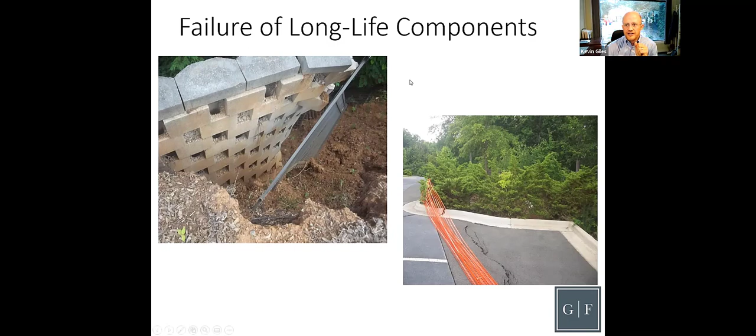We have some slides coming up in a minute, more specific about reinforced concrete construction, to help teach you a little bit about what to look for.

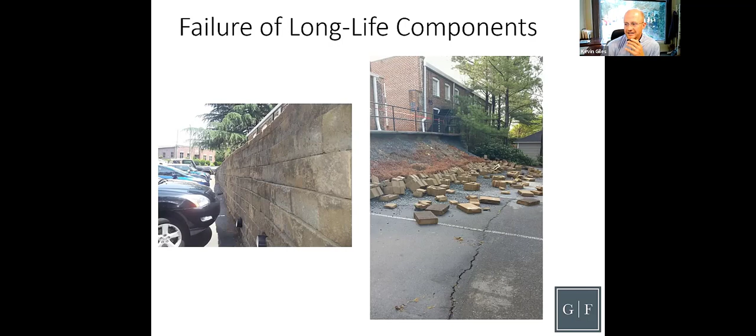So this particular retaining wall is an interesting story in that we were literally on site 6 months prior to that complete collapse. But again, it's the unseen components—the geogrid reinforcement that was not installed on this particular wall. You would not necessarily see it if it had been installed. It's a hidden component, and after the failure, you can clearly see there was no geogrid fabric reinforcement behind it, and the drainage systems were also not adequately installed behind the wall.

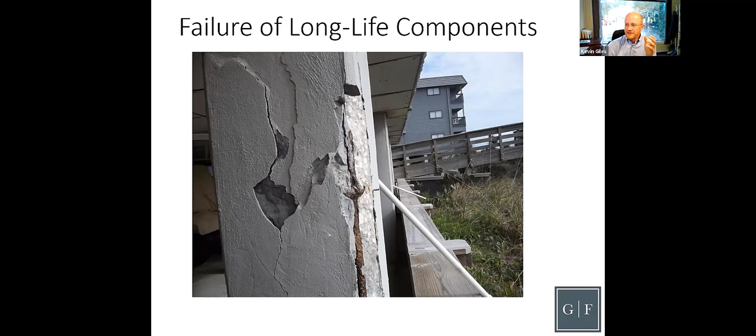On this one, the whole corner of a column had fallen off—a chunk of that concrete had fallen off this particular column. Here's more spalling that happened in that concrete column. These are the symptoms to look for. I'd like to think any layman could look at this and tell you something's not right—this is not what it's supposed to look like. So if you see this on your buildings, it would be cause for concern.

This particular building had an engineered plan in place for how to repair all of these columns. They had already established funding, budgeted from reserves to fix it, but they had to prioritize the repairs—the worst columns were going to get fixed first. Due to funding constraints, they were going to delay the secondary columns, which didn't have as bad spalling, for another year or two, repairing them over a period of time.

There are some repair options that are pretty reasonable for fixing these types of issues. To prevent this in oceanfront environments, keeping those columns painted will certainly help.

That's probably the best prevention method, keeping those columns painted and those exposed concrete surfaces covered with a good coating to prevent moisture intrusion. But if you see deterioration, it's certainly a structural problem.

This concrete, in theory, would be another long life component. These are reinforced concrete construction, something that would have a 50 to 100-year plus expected useful life, and we would not generally anticipate premature failure. Now if it's in a coastal community and you're working with a very experienced reserve study provider, they've probably seen this before, and they'll start recommending that as you approach year 30 or 40, you're likely going to start seeing some of these issues.

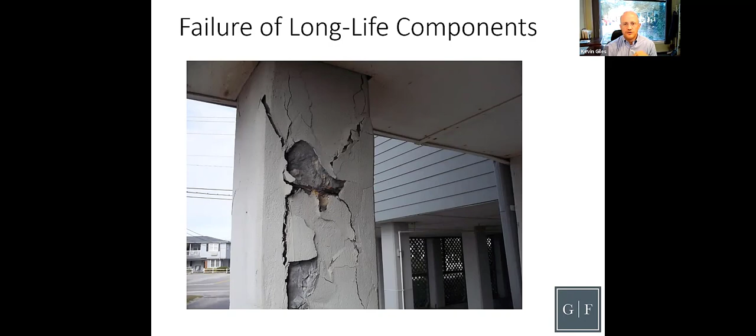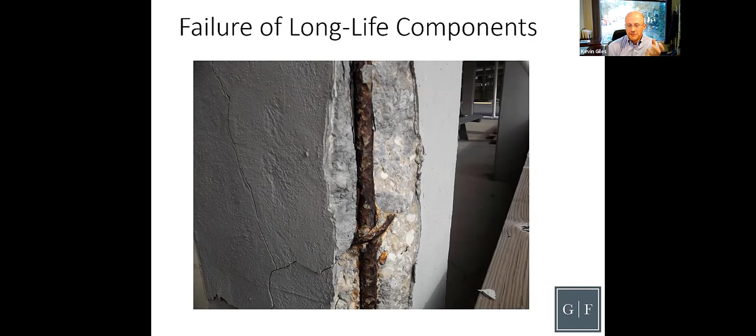So again, these are just some examples, some photos of those components. The construction for that building in Miami was reinforced concrete, so it's the same type of construction as this.

The next few photos will show you how these columns are constructed. This is from a different project we worked on, a new construction project using reinforced concrete columns. In this photo, you can see that the rebar has been set up.

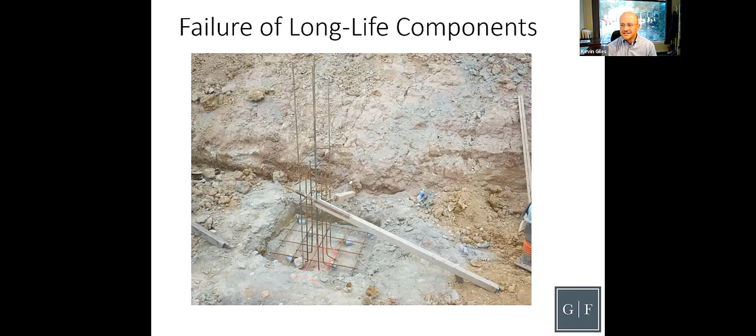So they've built their rebar cage, as they call it. That cage, that rebar layout, is designed by an engineer. The size of the rebar, the spacing of the rebar, how all of this works is designed by an engineer.

After the rebar cage is built, they build the formwork to go around the rebar. You can see these wood boards, these 2x4s, holding the formwork in place, and then they're angularly braced back down to the concrete slab, holding that formwork in place so we can pour the concrete into it.

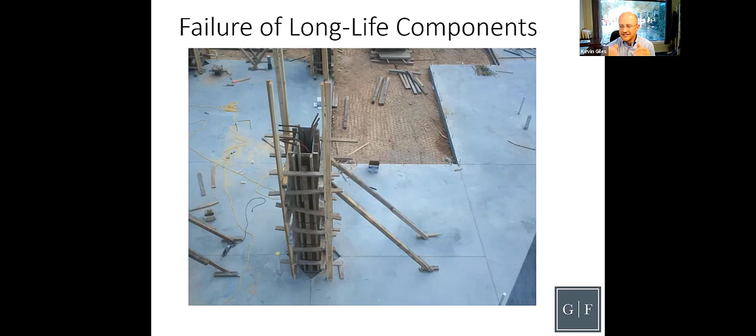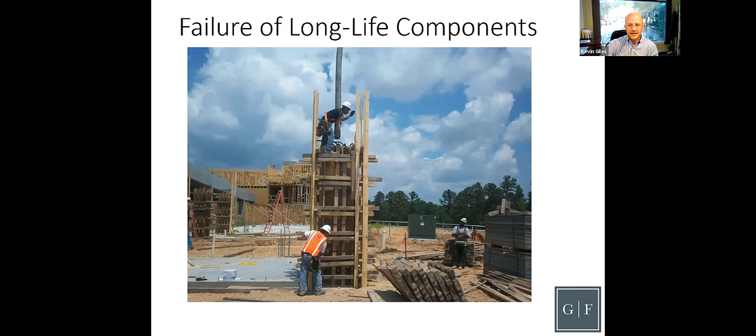This photo is looking down onto a column from above. Here we're pouring the concrete into the formwork, into that column. That hose coming from above is attached to a concrete pumping truck that's pumping the concrete into the column, and those workers are holding the hose in place. There's usually a vibrator installed to make sure the concrete fills all the empty air pockets within the formwork.

I see a question here about a 50 to 100 year lifespan for retaining walls seeming way over optimistic. I would certainly agree for wood retaining walls. Any wood retaining walls we see, we'd estimate certainly a 20-year life.

The way we approach it for reserve studies with retaining walls is, if there's a significant volume of segmental block retaining walls that would pose a significant amount of risk to a community, we're certainly going to allocate some funds for those repairs.

However, we've certainly seen plenty of segmental block retaining walls. I think the technology is about 30 to 40 years old now, they started using it in the early 80s, I believe. We've seen plenty of communities with segmental block retaining walls that have had no movement, no deflection, no cracking, no apparent deterioration whatsoever, and they're already at year 30 or 40. There's nothing to suggest otherwise. It's a stable component, it's concrete. So depending on the retaining wall type and construction, that will depend on what we estimate the estimated life to be for retaining walls.

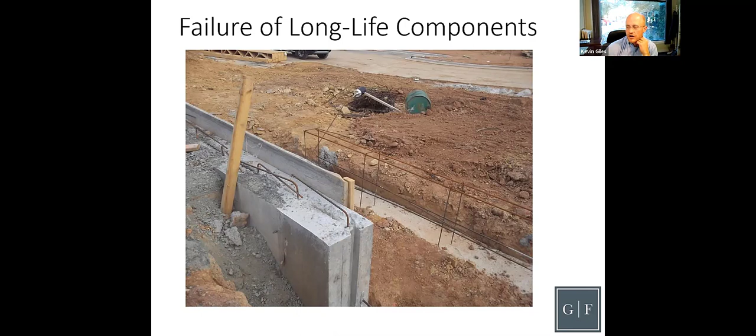Moving forward a little bit, there's a whole bunch of other long life components that an association should at least be aware of when doing your reserve studies.

If these components are common areas, these are some things you should be taking an active role in your reserve study process to make sure you're being covered for, or at least aware of, so you can know what risk you're assuming as an association.

Foundations and framing components, like a wood framed house or a cinder block CMU foundation wall, are generally accepted as permanent structures. We've got plenty of houses built in the early 1900s that are still standing today, well over 100 years old. These foundations and framing systems are generally supposed to be permanent. However, depending on soil conditions and other factors, you could have settlement in foundation walls that would require stabilization or other repairs.

Depending on framing situations, termites can certainly wreak havoc on wood framing. If you have crawl spaces that your association is responsible for, like a 3-story stacked condominium building with crawl spaces underneath the bottom floor, those typically become common areas the association is responsible for since they're not inside the unit envelope. Crawl spaces can be neglected - that's one of those gap areas where no one ever goes in or worries about it, and then a home inspector eventually discovers standing water, mold, and rotted wood.

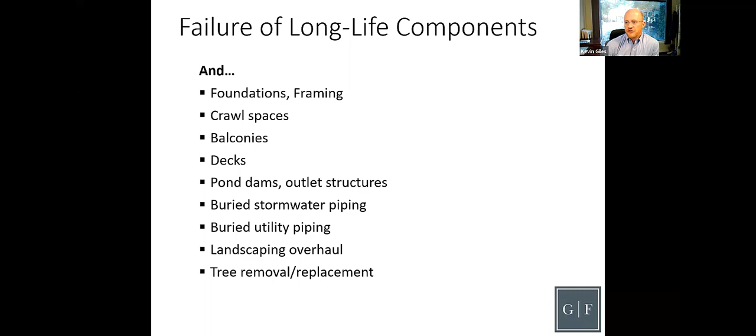Another surprise or unexpected expense can be new ordinances.

A couple ordinances that are most common would be the ADA, Americans with Disabilities Act. If you've been through enough of these webinars, you've probably heard one or two about accessibility and what an association's requirement is for meeting accessibility standards, even if they were grandfathered in and the buildings were built beforehand. So there could be some surprise expenses regarding making your older buildings accessible.

Fire suppression systems - the state of Florida has actually been in about a 15 or 20 year court battle forcing older buildings to retrofit with fire suppression systems. So if a building was built in the 70s or 80s and did not have fire sprinklers, the state of Florida is now pushing for those buildings to get fire suppression systems installed.

Pond dam hazard ratings - in North Carolina, maybe 5 or 6 years ago, the state reset the rules for how they label dam hazards. So your pond that your community owns and maintains with an earthen dam, which North Carolina had considered a low hazard, was changed to possibly medium or high hazard, which then required emergency action plans and a bunch of other things. That's another possible new ordinance that may come with a surprise expense.

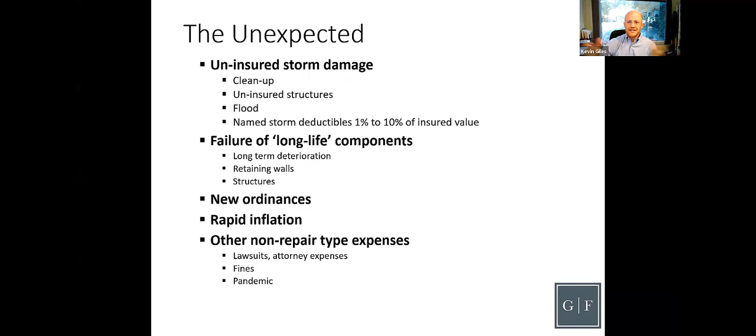And then the other non-repair type expenses: lawsuits, attorney expenses, that type of thing. So these are what I'm calling the unexpected major expenses. So how to plan for it, how to budget for it.

A couple different sources. Number one, insurance - talk to your insurance providers, figure out where those gaps are, figure out if you can buy additional coverage, figure out if you feel like you have enough retaining walls to warrant insuring them, then maybe you should add those to your insurance policy.

Another thing is having margin in your budget. If there's a little bit of extra room in your budget every year, that's going to provide you at least some of that basic margin to give you flexibility to help cover some of these expenses.

A lot of the communities we work with, it just seems the goal is to keep the dues as low as possible, reduce the dues, don't ever raise the dues, keep them as low as possible. But the buildings are going to continue to deteriorate, continue to get older, and the cost of materials is going to continue to go up. This is always going to happen.

The mindset of we need to never raise the dues - I don't see it in governing documents that says the responsibility of the board of directors is to never raise the dues. It usually says the responsibility of the board is to maintain, repair, replace, and manage the common areas. It doesn't say you have to keep the dues as low as absolutely possible. So having some margin in your budget will help fund those unexpected events. The reserve study is a very good tool.

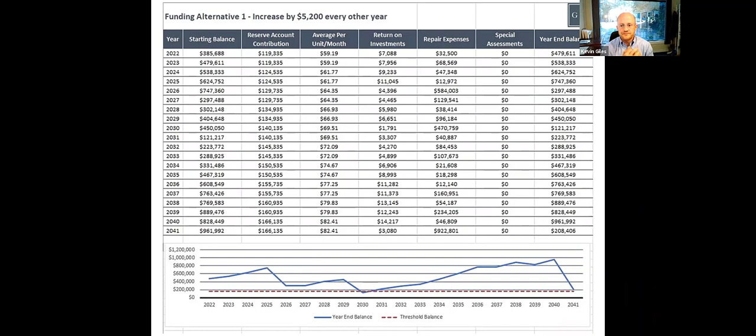Okay, a couple of questions rolling in. So long-term items, do you recommend adding repair allowance into your study?

Yeah, it depends, it depends. I hate to sound like an attorney. If we're doing a 20-year reserve study and we see something that we think is going to last 25 years, then yes, we're going to put an allocation of funds at year 20 to begin to prepare for that. We're going to call it an allocation of funds to replace metal roofing or whatever the component is. And then we're just going to have a discussion in the report - hey, look, this has an expected useful life of 25 more years. It's going to fail shortly after the end of the term of the study. We've provided an allocation so the association can plan for it.

Now, if something has a 40, 50-year remaining life, no, I'm probably not going to include it on a 20-year study. I don't feel like it's reasonable with that many variables out there, and this thing could have a 70-year life. I don't think it's that reasonable to be planning that early for that type of an expense.

Okay, this next question may be out of your scope, but how can we find a qualified person to act as our treasurer? Our board of directors isn't experienced in budgeting. Should we use...

Go find the retired CPA, right? Isn't that the ultimate thing - go find the retired CPA in your community and voluntold them, or voluntel them, to serve as the treasurer. Rely on your professionals, rely on your community manager, rely on the CPAs that your community manager can connect you with. Might even be worth it to pay the CPA that your manager recommends to come in and have like a 2-hour long training session to help you through that first budgeting process. Just rely on those professionals.